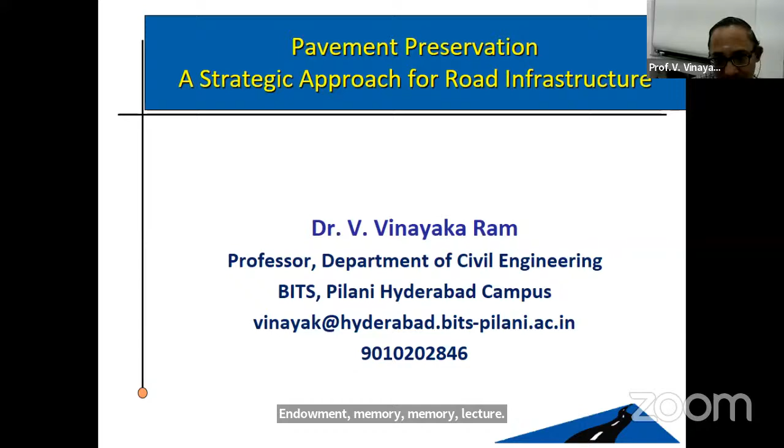So today we are going to talk about pavement preservation, a strategic approach for road infrastructure. This is what we actually target for — a beautiful road without any failures, serving for a very long time. Usually we talk about 10, 15, or 20 years of service life, whether it is a flexible pavement or rigid pavement. We want the road to be serving very beautifully, just like this.

But is this the way roads are happening right now? The problem is the roads are not maintained properly unless a failure is occurring or has happened. Our departments will not initiate the process of maintaining roads. So in this lecture, what I'm planning to discuss is why can't we go for preventive maintenance aspects? It's not a new topic altogether, and the rest of the world is using it — some countries very popularly — but India is yet to take off in implementing these preventive maintenance aspects.

So I will share my views. Many of these views are already available in Federal Highway Administration's reports. I just compiled all the reports and tried to present them here.

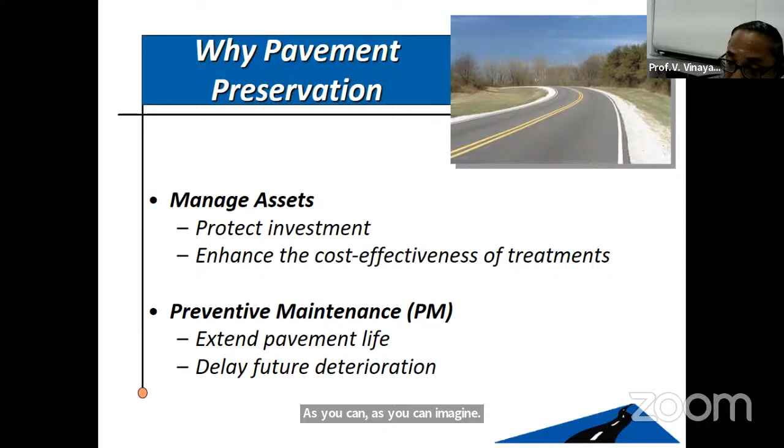Now, coming to the topic — why is pavement preservation required? What is so great about it? Basically, it's part of pavement asset management, and pavement is the biggest asset the world can ever see, because the amount of money that goes into pavement construction is enormously high. As you can imagine, a single lane highway per kilometer per lane will cost anything between 3 to 5 crores of rupees, or even 7 crores. It depends on the subgrade condition as well as other conditions, like how many cross-drainage structures are required and how it is going to perform.

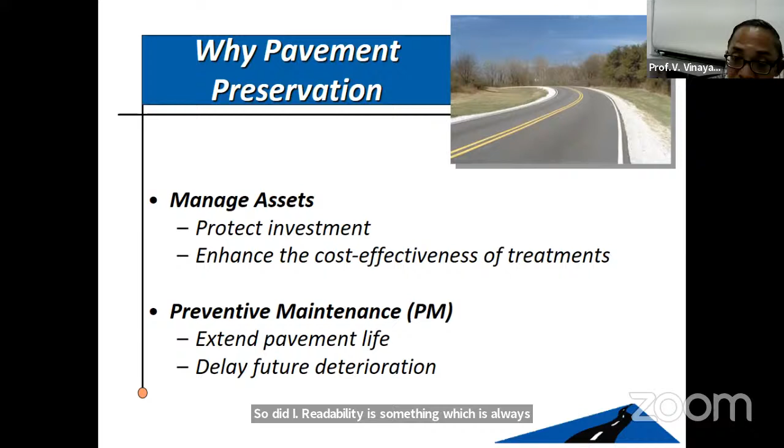Weather conditions also play an important role. If extremely bad weather conditions are prevalent in a particular area, you may have to use special materials and special binders to manage the performance of the pavement. Rideability is always important, and in extreme weather conditions it becomes very challenging, so we need better materials and conditions for the road to sustain for 15-20 years.

It can cost anywhere between 3 to 10 crores of rupees per kilometer per lane. So it's a big asset, and thousands of kilometers of roads have been built, but unfortunately most of the roads are not maintained properly.

Unless there is a program like PMGSY, where for 5 years the contractor has to build the road and then maintain it for 5 years without any problem, such mechanisms are not available in many other cases.

Secondly, such programs enhance the cost effectiveness of treatments. Treatments are something that are always quite tricky, and applying the correct treatment is a big challenge.

Many of our engineers, unfortunately, are not really aware of what kind of treatment they are supposed to use, at what time, and how to implement it. Not many of us are trained in that manner, and we are lacking manpower on that side.

In addition, the availability of appropriate materials is a big question mark. Appropriate machinery is also a big issue.

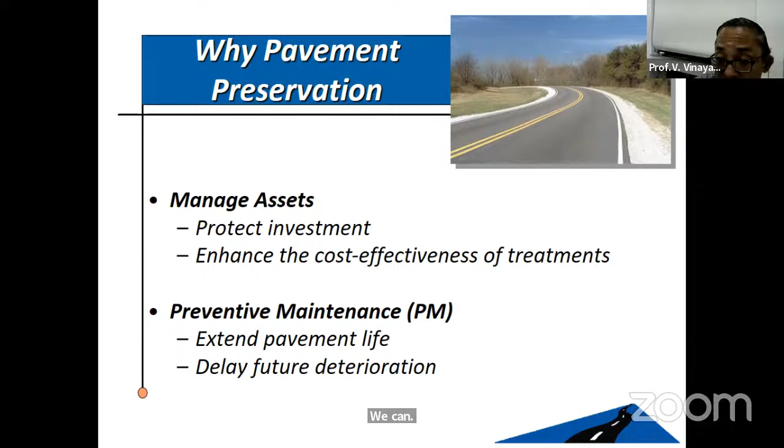Hydrophobic materials can be added as part of the bituminous concrete to enhance the life of the pavement. These are all various things we can learn under the pavement preservation concept, including the advancements the world has seen, which I'll be discussing in this lecture.

Enhance the pavement performance. The performance, functionality, as well as safety is something which is always seen by the drivers. The moment a person is going on the road, whether he is a transportation engineer or a general normal person who doesn't have any idea about transportation, still they will judge the pavement quality based upon the functionality as well as safety - how much friction the pavement is giving, how much safety, how much smooth riding surface the pavement is giving. All these things are actually judged by everybody.

Whether you like it or not, when the road is beautiful, immediately the kind of satisfaction comes and crops up. The driver will say, okay, I'm driving a very good surface. Similarly, when the road is having a lot of potholes and other things, immediately our brain will start rating the pavement and cursing all the engineers involved in the maintenance process. So the serviceability of the pavement, or condition of the pavement, is something which is actually playing an important role in day-to-day life of the human being.

So that will be the topmost priority of the pavement preservation concept. Then, reducing the user delays. What is this user delay? User delay is something wherein when the pavement is not in good condition, obviously the riding quality will not be adequate, and you can't travel at the speed at which you would like to travel. So obviously delays are going to happen, and potholes especially - not only delays, even loss of life is also enormously high in the case of heavily potholed roads.

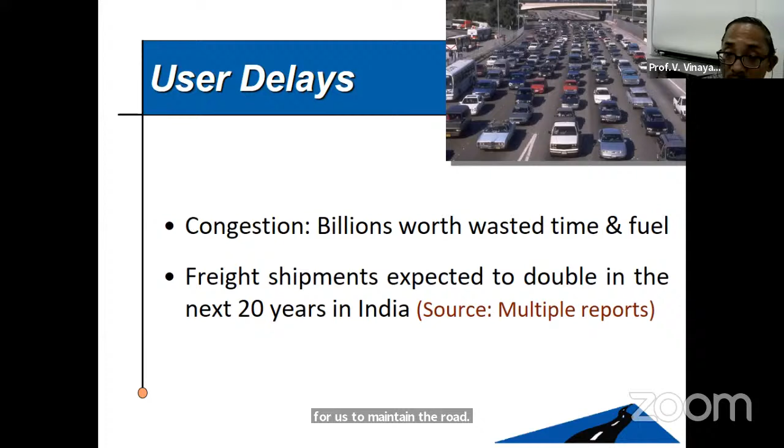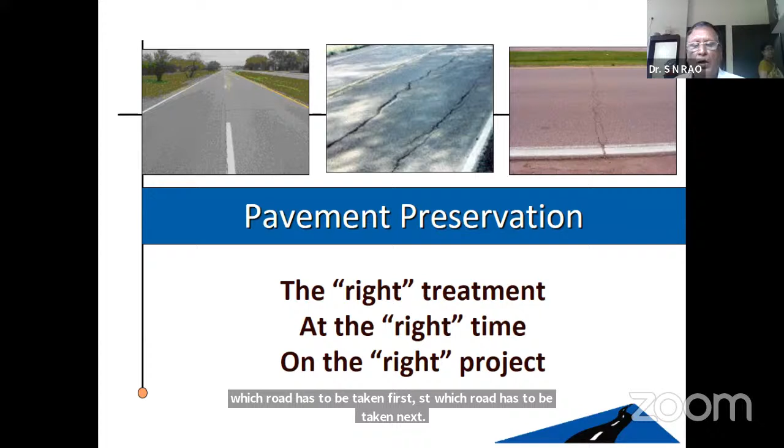Then, what is pavement preservation? Pavement preservation is something where we actually go for the right treatment at the right time on the right project. For example, we have multiple roads, and the big network of roads will be given to a pavement management agency, and that agency is supposed to take care of all the roads and maintain them in good, rideable, or serviceable condition. So which road has to be taken first, which road has to be taken next, which road has to be given priority, which doesn't require any priority - all these things we need to actually take judicious decisions on, based upon some scientific process. That's what we require actually.

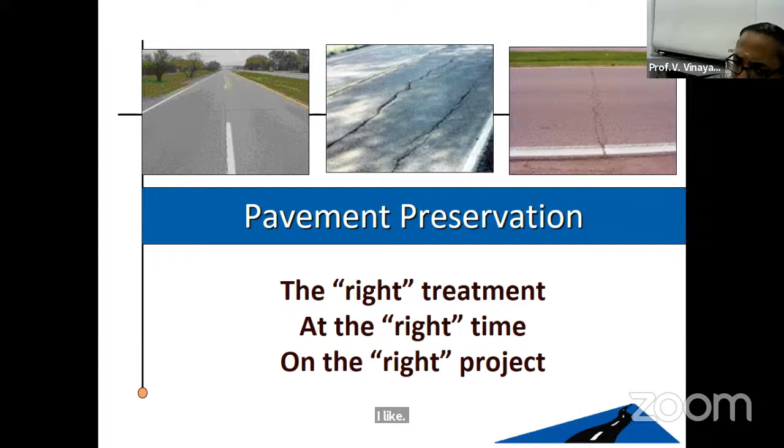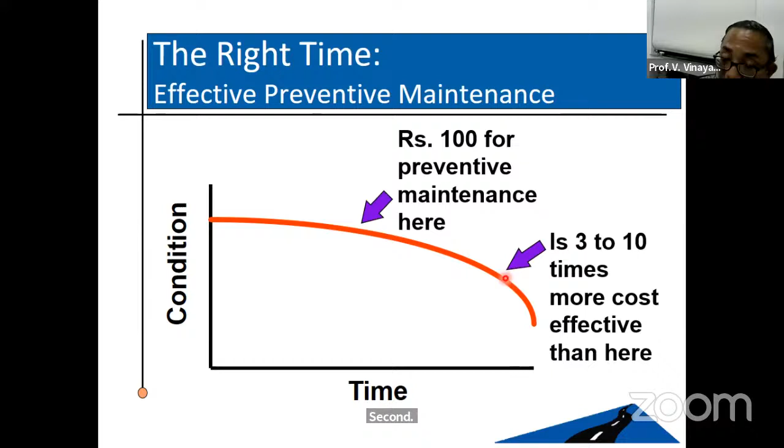Then, if you can see here, the right time - if you spend something like 100 rupees for preventive maintenance here, the condition is not deteriorated, it is still in good condition only. At this point of time, the Indian understanding is we will never even look at the pavement when it is in good condition. But the preventive maintenance aspect, which is going to be discussed today, clearly mentions that you need to have a kind of preventive maintenance program, so that the 100 rupees spent here is worth 3 to 10 times what is actually spent here. I mean, if you are spending 100 rupees here, you may be spending almost 1,000 rupees if you start looking at the pavement only after it deteriorates, trying to bring it back to good condition. So that's why it's very essential for us to understand the importance of the preventive maintenance aspect - it will extend the life enormously.

When we design the pavement for 20 years or 15 years, the actual life of the pavement is going to be much more than that when you go to the preventive maintenance aspect. So if you look at the life cycle cost analysis, the pavement condition deteriorates with usage, and with time it actually goes down.

This is where we are supposed to have some maintenance, for example based on the pavement condition index, or PCI, which we normally find out in the field. Every engineering department will have their own division where every year they travel on the road to find out the various failure conditions and rate that pavement on a 0 to 100 scale. 100 is the best possible condition, whereas 0 means the pavement is not at all there.

There is a threshold value here, around 50, and we are supposed to structurally lift the quality of the pavement so that it becomes good quality again, and the traffic will feel more comfortable.

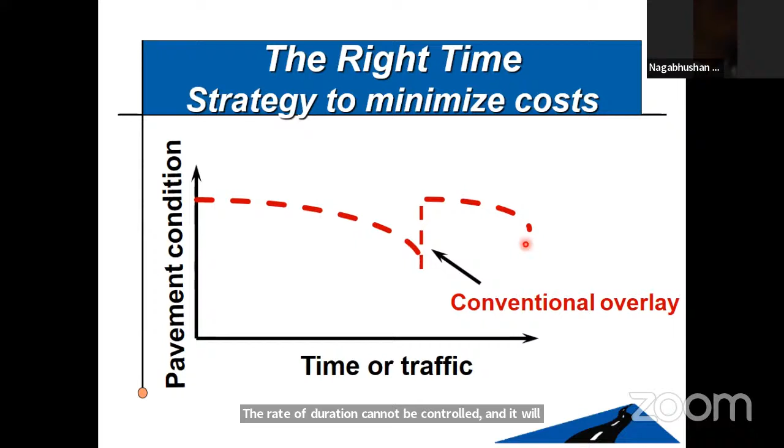So we should actually stop this. With this conventional overlay mechanism, the rate of deterioration cannot be controlled, and it will fail at very frequent intervals. We have to take care of this, so conventional overlay is not going to work.

You can see here the green line, that is what is called preventive maintenance. We are not allowing the pavement to go down, and we are having small treatments, a very small treatment here, here, and here. Throughout the life of the pavement, the serviceability condition is absolutely beautiful.

So the road cycle, the vehicle operating cost, generally called road user cost, every cost will be very minimal when you go for preventive maintenance treatments. The replacement of spare parts of vehicles will be minimized, and people will be extremely happy, and the economy is also improving.

There are indirect benefits too, in terms of the number of accidents getting reduced with better roads being provided throughout the service life without any gap, and vehicle operating costs coming down drastically. Pollution is also coming down, and there are so many other benefits which cannot be measured in terms of money.

Of course, a road user cost study report can give you some guidance about converting travel time savings or vehicle operating cost savings into categories, so you can find out how much savings you're making. But in reality, the amount of savings the society is going to have is enormously high, so you can't even compare.

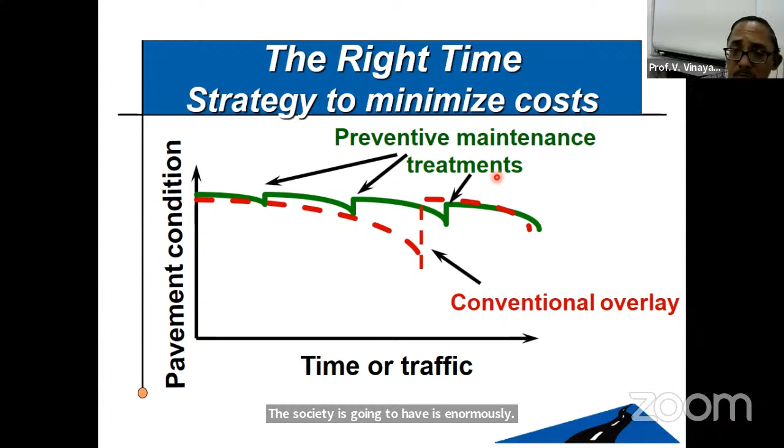This is the beauty of the preventive maintenance treatment. As I told you, preventive maintenance arrests the deterioration, retards the progressive failures, and reduces the need for corrective maintenance. Let me give you one small example: you are allowing a pothole to happen, so the pothole has taken place, some cracks have extended, and water has ingressed into the pavement.

After vehicles continue moving over such cracked portions, the cracked portion slowly gets detached from the pavement, and progressive formation of the pothole occurs. The pothole becomes bigger and bigger, especially during rainy seasons, when rainwater accumulates in the pothole area and progression becomes enormously fast.

So when it is progressing very fast, why is that happening? Because you have not treated the cracks properly at the appropriate time. The cracks have networked, and water has found its way into the pavement, causing stripping and other failures.

Then potholes start happening, and vehicles keep moving because no repair is being done. By the time the department wakes up and goes to the site to start repairing, the damage would already be very big. Once water enters the bituminous pavement, the bitumen doesn't behave or perform the way it's supposed to.

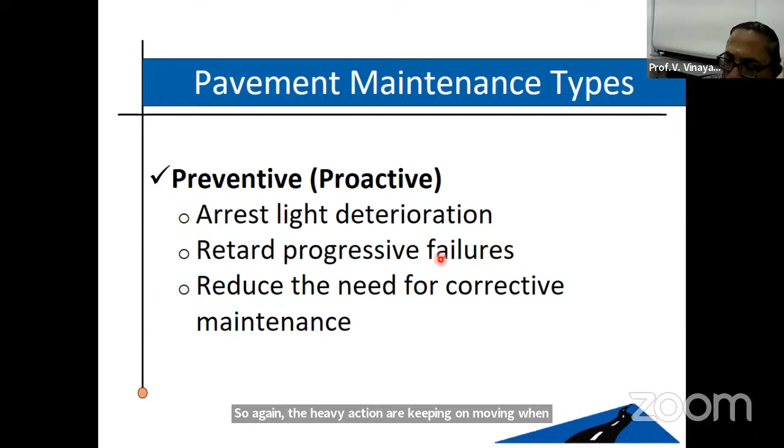This is one of the worst possible scenarios. Heavy axle vehicles keep moving, and as they move, the impact load and fatigue load applied on the pavement keep increasing because of the undulations and potholes.

So the failures actually propagate, causing further deterioration and increasing the rate at which deterioration takes place, making the failure pretty high and pretty fast. So in-time maintenance is something very, very important.

If you don't allow the cracks to even develop or go beyond certain limits, then the further repercussions of pothole formation can be completely prevented. We have to take care and arrest the light deterioration at the beginning, so that heavy deterioration doesn't happen and we don't end up with a lot of failures to really attend to. That is one very important thing we need to do.

Of course, corrective maintenance is what Indians are using. Most departments are still using only corrective, reactive, or prescriptive kind of mechanisms. Unless the failure is coming, engineers will not go to the site and will not initiate the process of maintaining or repairing the pavement system.

So cracking correction, excessive deflections - of course they don't even bother about excessive deflection. That's what I have seen with my own experience. When deflections are happening, it is a clear indication that the pavement has lost its service life, and the structural strength of the pavement has gone down.

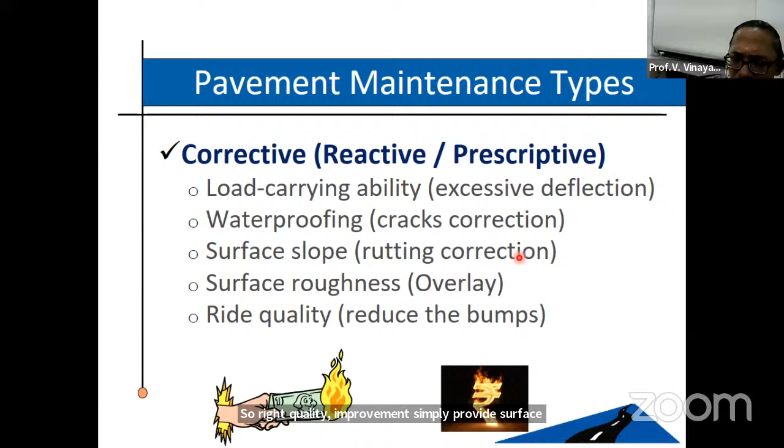So corrective measures, reactive or prescriptive measures, they are all not scientifically planned. Most of the failures are repeatedly happening because of unscientific corrective measures or prescriptive measures. For ride quality improvement, they simply provide premixed carpet; for surface roughness, again one more layer of premixed carpet. Unfortunately, this is what is happening. That should be stopped.

There is a beautiful slide given by the Federal Highway Administration on Pavement Serviceability Index, or Pavement Condition Index (PCI) as we call it in our Indian context. All our engineers know how to find out the PCI through surveys. You can rate the pavement in the range of 0 to 100 -- 100 is the best pavement service, and 0 is the worst condition.

If you see, at about 90 starting down to 60, that range is always a good pavement. 50 is the threshold value. Anything above 50 is actually a good, acceptable condition.

So 60 to 90 is the range where routine maintenance can be done. Whenever you see small failures, small cracks coming, immediately go and fill the cracks -- don't even wait for the crack to become big. You have to do all that. Small potholes may happen, and they have to be filled within no time. This kind of routine maintenance should be taken when the pavement serviceability condition is in between 90 and 60.

Similarly, preventive maintenance: when the pavement condition is around 80 down to about 50, that is the right time for you to go for preventive maintenance. This is not just given arbitrarily -- a lot of studies have been made by the Federal Highway Administration, one of the world's topmost organizations in the pavement engineering industry. This is what Americans follow, American road agencies follow, and other advanced countries are also following the same thing. So within this range, preventive maintenance should take place.

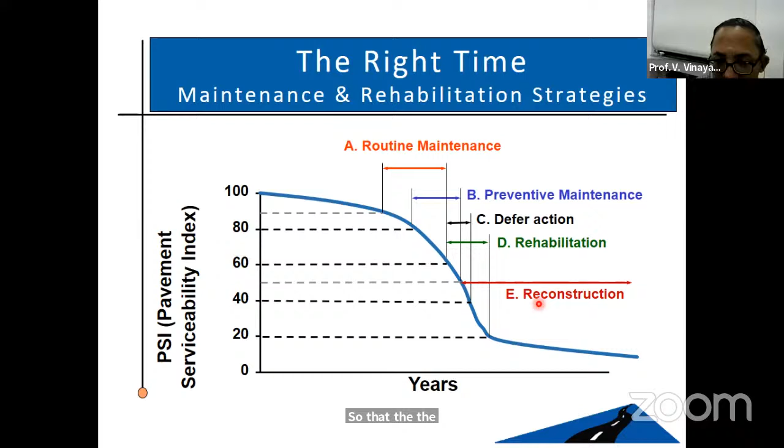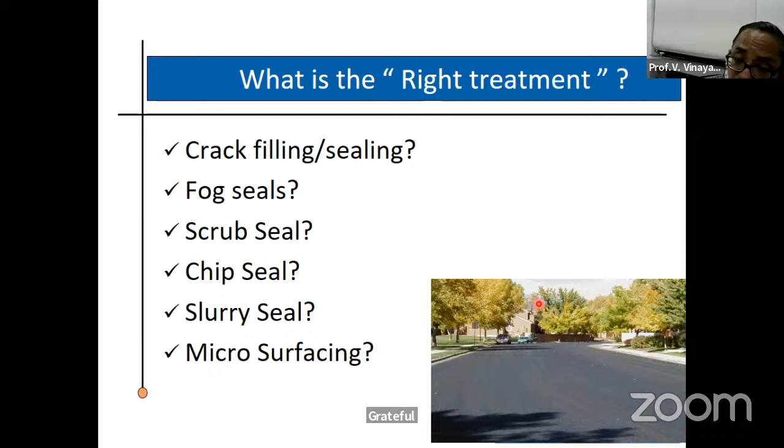Now, what is the right treatment? We need to understand this: crack filling, sealing, fog seals, scrub seal, chip seal, slurry seal, micro surfacing -- these are all names we normally hear. Macro surfacing, thin bonded wearing course, thin HMA (hot mix asphalt) course, overlays -- these are all various names we hear on a day-to-day basis. But what to use, when to use, and how to use -- there is no clarity on all these things.

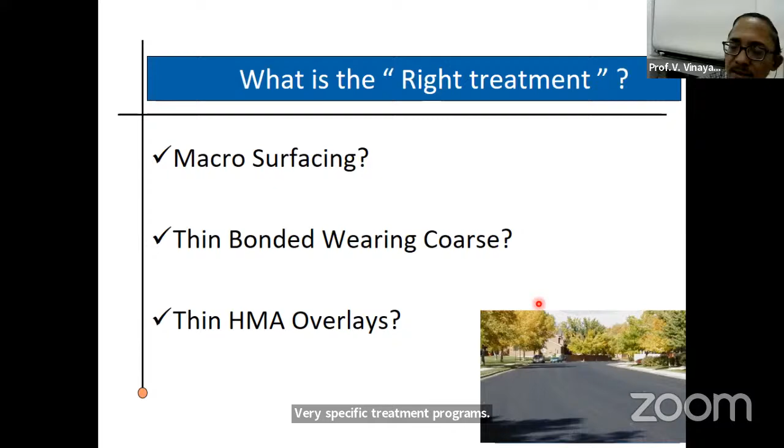That's why I suggest all engineers go through this particular mechanism. This is only a beginning -- within 1 hour or 1.5 hours I will not be able to cover all the areas required. I usually give training programs for in-service engineers for 3 to 4 days; I gave such training earlier at ASCI. I think it requires a longer time to train every aspect of these specialist treatment programs, so that engineers will be able to completely understand and then go to the field and start working on that.

I'll just give an overview of what is what. The right treatment depends upon the existing pavement. First of all, we have to analyze the type of pavement and the kind of distresses available, whether it is a structural distress or functional distress, and whether drainage is properly available.

Drainage is something which is unfortunately very poorly managed in India. Most of the failures are initiated because of very bad drainage systems. In Hyderabad, during the Nizam's time, whatever drainage system was provided, the same drainage with an addition of another 10% has been maintained. But the current road network in Hyderabad is way ahead of Nizam's time, and most roads will not have any kind of drainage at all.

That's why even if a small rainfall happens, the entire road gets inundated. Big floods come, resulting in a lot of loss of life and a lot of failures. Again, potholes are a perennial problem in Hyderabad, just because of very poor quality of drainage.

In India, our people are not actually taking it forward. There are so many institutes and experts available in and around Hyderabad who can give the solution for all this, but unfortunately nothing is taking place. Even today, Hyderabad is suffering. Floods are happening, and pavements are failing with a lot of potholes and other failures because of the very poor quality of drainage system available in Hyderabad.

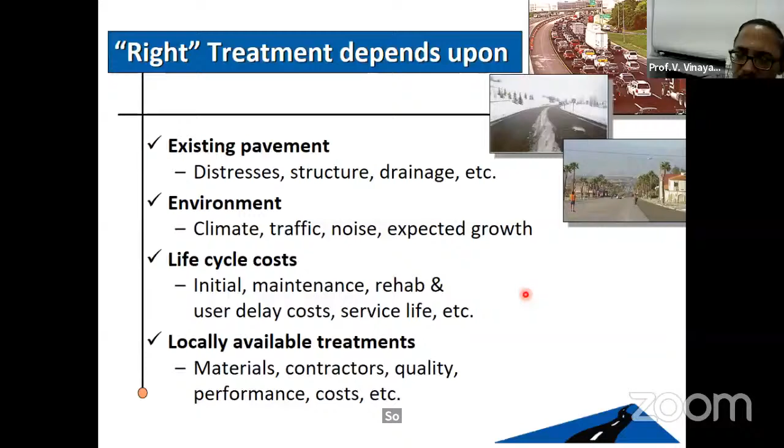Then SHRP has its own manual, which can be downloaded free of cost. All of us can download this manual, called a distress identification manual. It's a very popular, world-class manual. Several other manuals are also available, and you can choose any of those.

Some colorful manuals are also available. You can just take those manuals, and an engineer can learn so much knowledge or information regarding how the pavement fails and how to really find out the cause. The cracks look alike, but the reason for every crack is different.

Unless you understand the perfect reason why that crack is visible or how it is progressing, whether it is a networked crack, longitudinal crack, or transverse crack, the reasons are completely different for each. Where exactly the crack is lying, whether near the joint of the lanes, at the edge of the pavement, or in the middle of the lane, all that information you can find in the distress identification manual with beautiful clues and cues in the form of photographs.

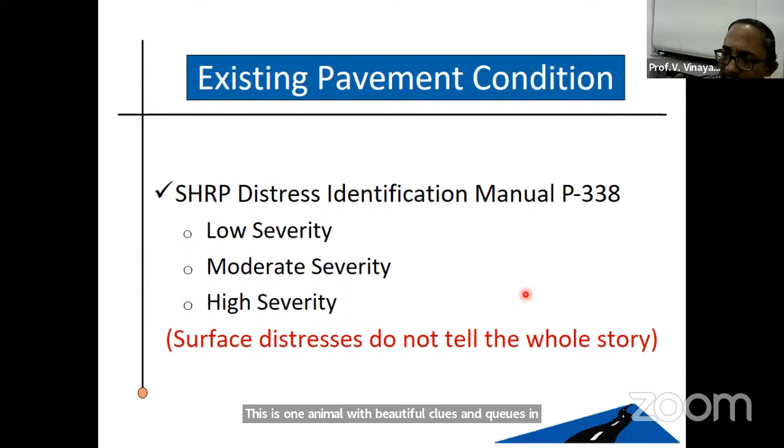The engineer can study that manual, take it to the field, and match the photographs with the failure happening there, and accordingly take the appropriate maintenance option. So unless you identify the reason, you will not be able to give the appropriate solution.

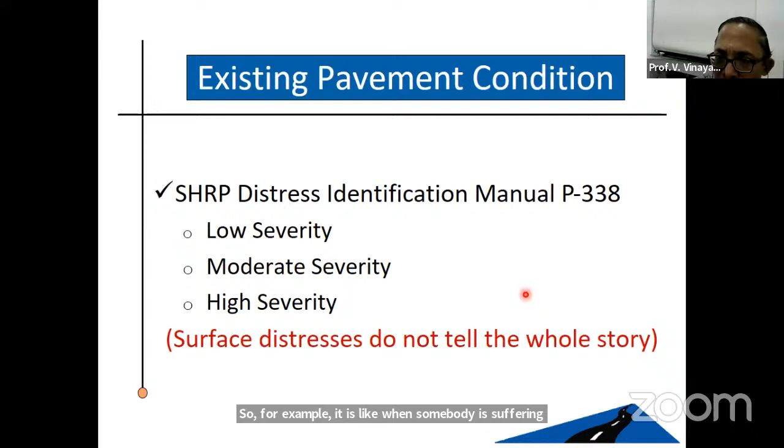For example, it is like when somebody is suffering with cancer, if you give crocin, will it really get cured? It is not going to cure. It is going to progress very, very fast. So that kind of thing should never happen.

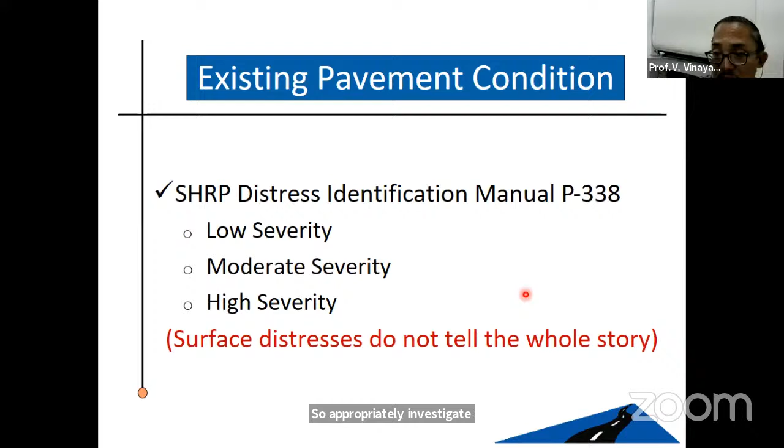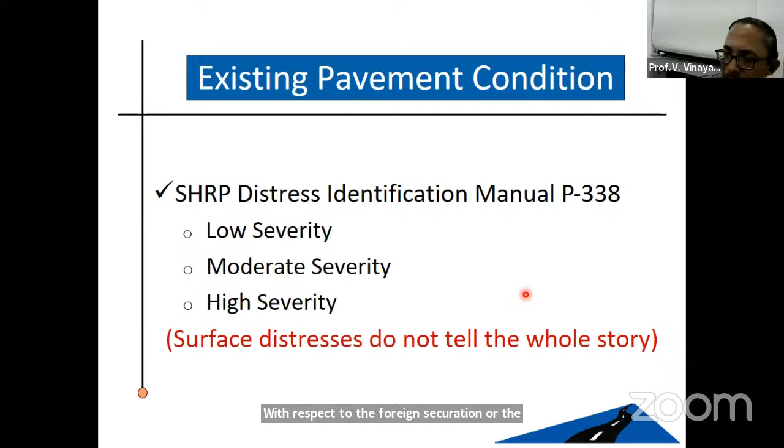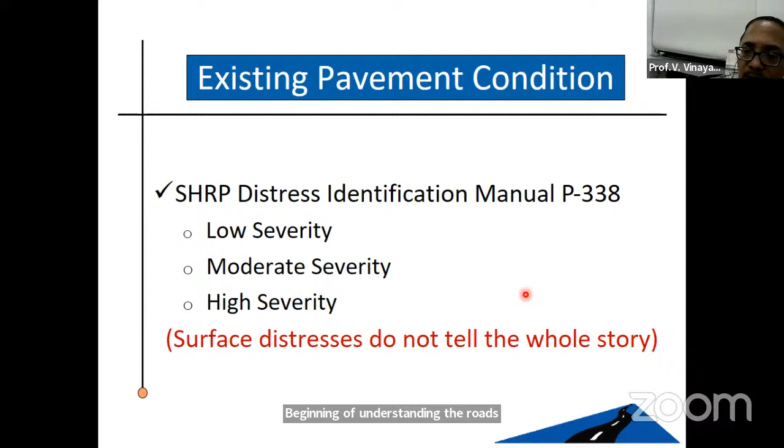You have to actually be a road engineer, a road doctor as we call it. So appropriately, forensically, you have to investigate. This forensic investigation is very important, it is a kind of need of the hour. Engineers on the field should be trained with respect to forensic investigation of various distresses. If somebody studies this manual, it will give a wonderful beginning of understanding the failures of roads and then how to really go ahead with the solution.

When you have got this much of crack, what are they doing? Another layer of bituminous premix concrete or some other overlay. But this crack means the stress is already released. Now again, you are creating stress by having this overlay, so the stress gets released again through cracks. The crack is initiated, and in the same vertical line, the crack will propagate, and again this overlay will get opened up within no time. So it's going to be a waste of exercise unless you take care of this interface.

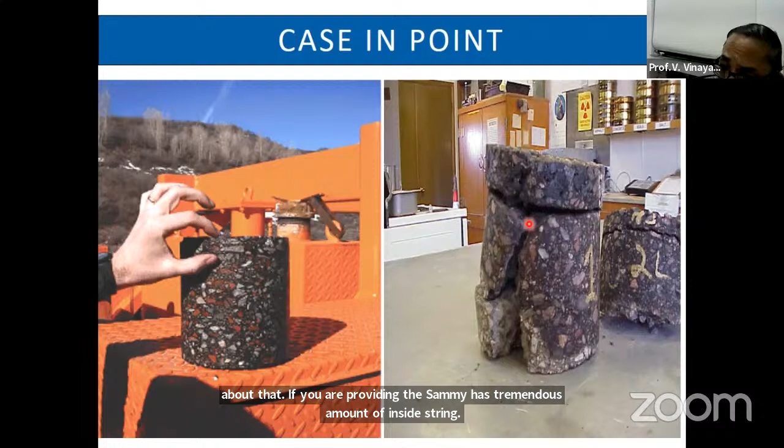So what is this interface? There are some solutions like SAMI interlayer, stress absorbing membrane interlayer. They are available, it's not theory, it's all practical. You need to provide those solutions there. If you provide SAMI interlayer above that, it has tremendous tensile strength, and this crack, if it wants to propagate, cannot crack through the SAMI interlayer into the top layer.

So the crack propagation will get delayed. Unless the SAMI interlayer is failing, the crack will not propagate into the top layer. So by just having one interlayer, one matte kind of SAMI interlayer between the failed surface and the top surface, you are delaying the failure basically, not solving it. If you want the entire solution, you have to go to the root cause of this failure, why this crack is happening at all. Then you can have the forensic solution, and you may have to remove the failed layers, recycle them, and replenish with a better layer.

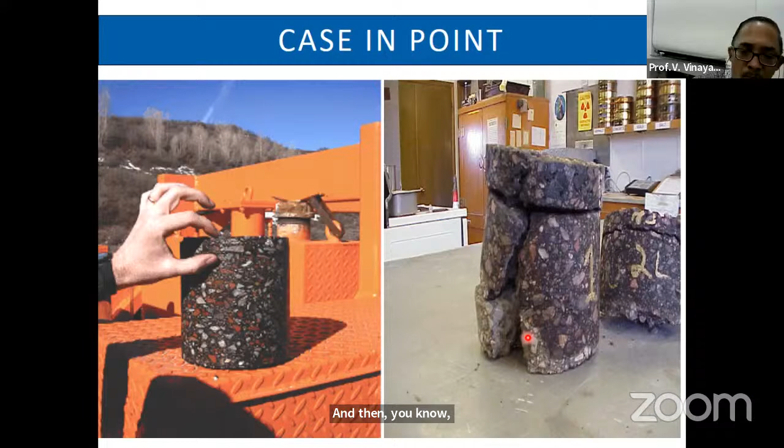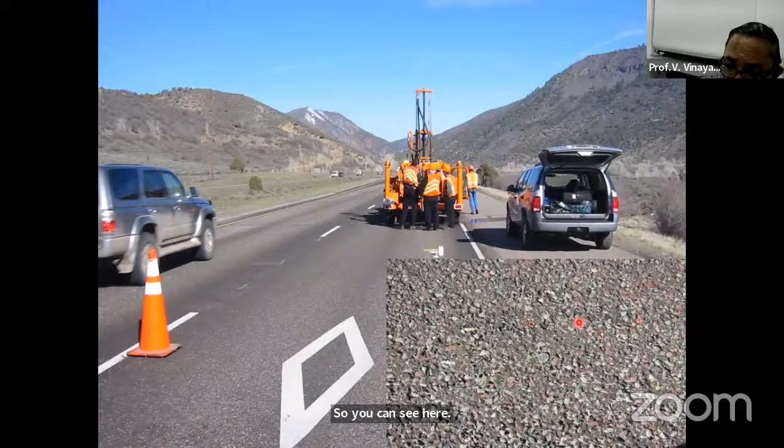Similarly, when the aggregate crushing value is less than 30%, please accept it. That's how it goes basically. But the mineralogy of the rock or stone is never taken into consideration. If it is a hydrophilic aggregate, even if it is passing other strength-related tests, it is not going to be a good option for the bituminous concrete layer or bitumen-based layers. That small mistake, the repercussion will be very, very bad.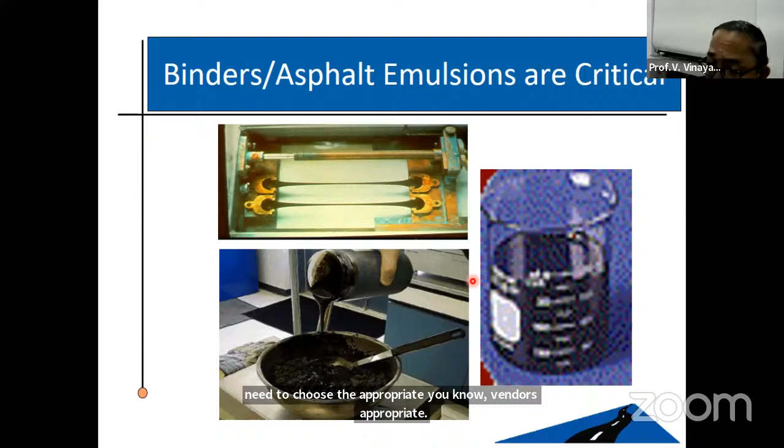So I think asphalts, binders and asphalt emulsions are all critical. You need to choose the appropriate binders, appropriate emulsions for various applications. Emulsions are being used for cold applications, whereas binders are normally used for hot applications.

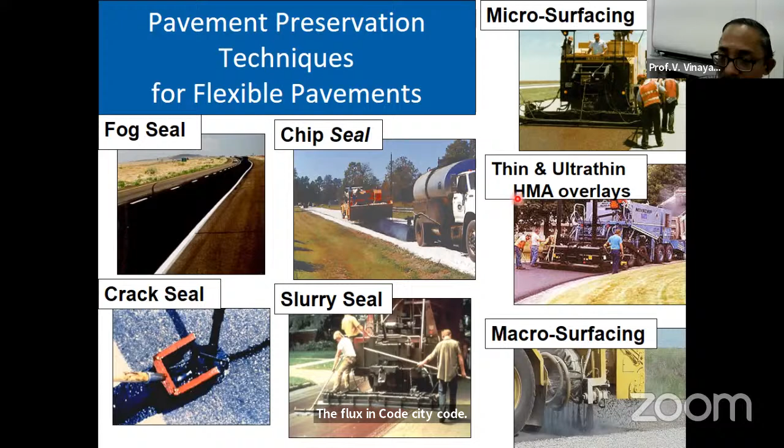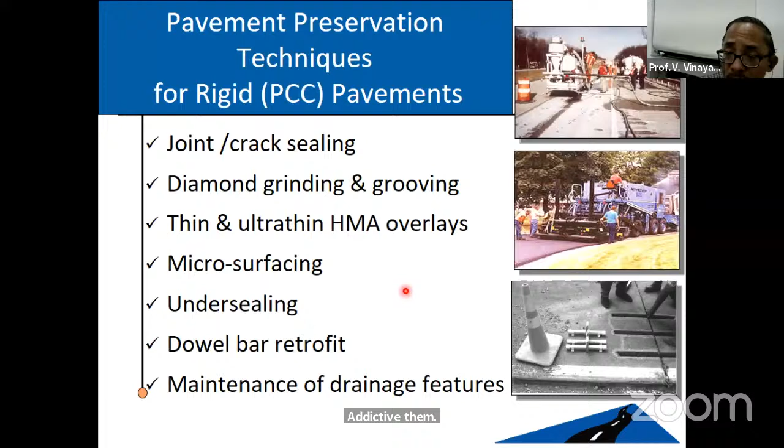Okay, so what are the various techniques available? As preventive maintenance programs: fog seal coat, chip seal coat, crack seal coat, slurry coat, micro surfacing, thin and ultra-thin HMA overlays, that is hot mix asphalt overlays. There are several techniques for bituminous concrete pavement. For cement concrete pavement, we have joint or crack sealing mechanism, diamond grinding and grooving, thin and ultra-thin HMA overlays, micro surfacing again, under sealing, dowel bar retrofitting, and maintenance of drainage features. These are categorized as techniques for PCC pavement under preventive maintenance programs.

So what is crack sealing? You can see here, when the crack is very, very small, we should have the necessary tools to fill the cracks properly and prevent further failure. When you have the tools to fill small cracks, further failures will not happen, and potholing is not going to happen at all. If you properly fill the cracks and see that water is not increasing or going into the pavement layers, that's very important. So routine maintenance, cleaning and sealing has to be done.

This prevents intrusion of water and incompressible materials. What are incompressible materials? When cracks are allowed to remain during dry seasons, small stone pieces fly and deposit inside the cracked areas - these are called incompressible materials. When incompressible materials go into the crack, the stresses on both walls of the crack will be high. When vehicles move, the stress generated by the incompressible material on the crack walls will actually open up the crack much further, so crack propagation increases over time. We should not allow any foreign material or incompressible material to enter the cracked areas.

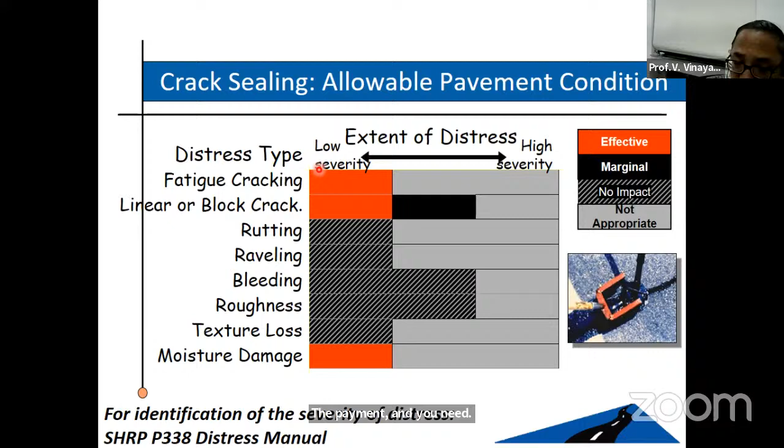So this is a wonderful tool in the hand of the pavement engineer who can take decisions based upon this particular sheet. You can see here, fog seal coat.

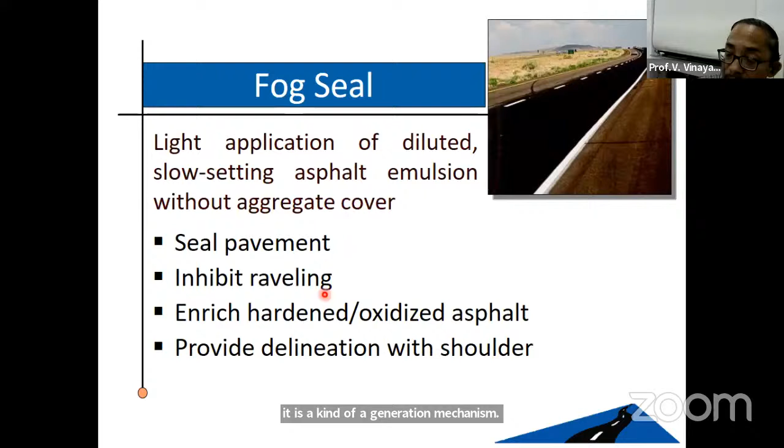There's another variety of solution. From a distance, if you see, when the seal coating is done, seal coat is actually applied on the pavement, it looks like a fog. It's a light application, diluted, slow setting asphalt emulsion or bitumen emulsion without aggregate. There is no aggregate here, it's only emulsion which is sprayed very fast. It looks like fog, so it's a kind of rejuvenation mechanism. It seals the pavement, inhibits raveling. Raveling means the separation of bitumen from aggregate, and aggregates are getting loose from the surface. So raveling also will be reduced, and the rejuvenation, you can see bright black color of the pavement when it is fog sealed. That kind of rejuvenation is possible.

It can enrich hardened or oxidized asphalt. When the pavement is old, maybe 4 or 5 years old, then oxidized or aged bitumen can be seen. Pale color, not dark black or dark brown color anymore, it converts into light brown color. So that very clearly indicates that the pavement has failed basically, the aging has taken place. So you can have this fog seal coat, it will seal all the surfaces and it rejuvenates.

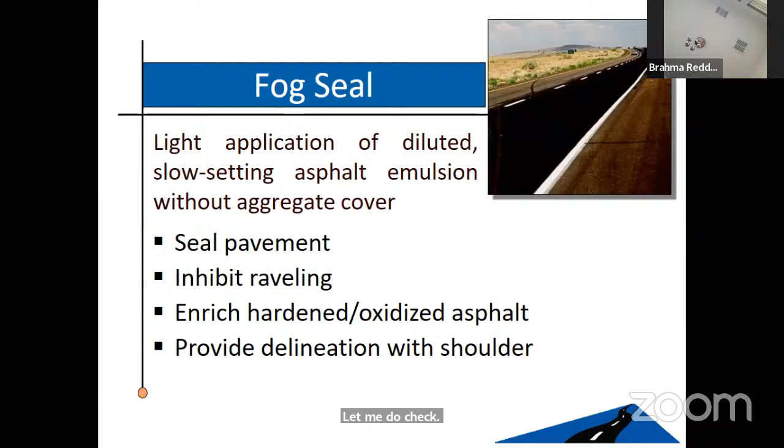Brahma Reddy, can you mute your mic please? Hello. Kindly mute your mics so that I can talk without any intervention. Hello, Brahma Reddy. Can somebody do the needful in muting the mic, please? Can somebody from Institution of Engineers speak, please? Hello. Hello, can you mute the mic, please? Yeah, thank you, please see that it is muted properly, sir.

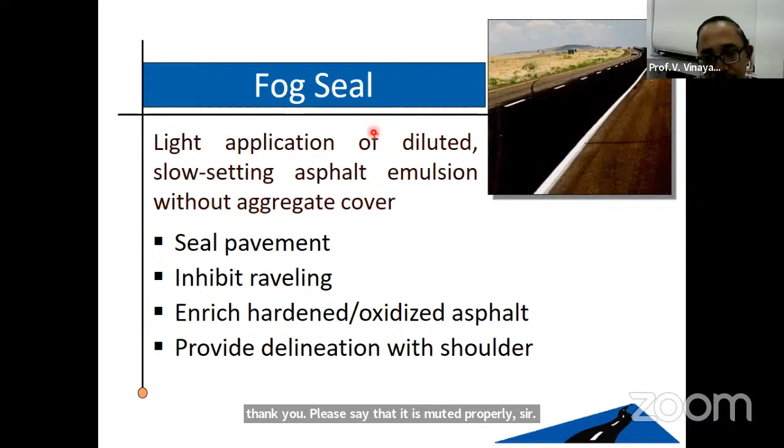It's going to be pretty dangerous. The moisture which is actually entrapped inside the bituminous concrete layer is going to deteriorate the actual pavement surface much more faster than earlier. When fog seal coat was not applied, when severity levels are medium or high, at least there was a possibility of moisture to evaporate into the atmosphere. But once you put that particular thin seal, the fog seal, the water will be entrapped permanently inside the bituminous concrete layer, and the deterioration will be much more faster. That's what it very clearly says - it is not going to be appropriate at all. You are not supposed to use fog seal coat when the failure levels are medium or high severity.

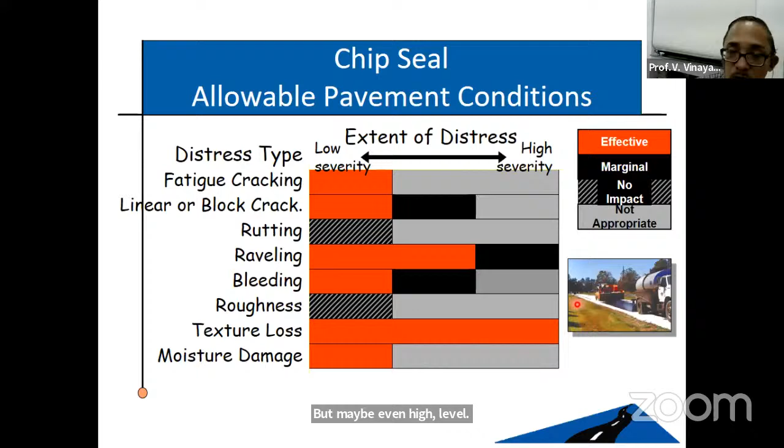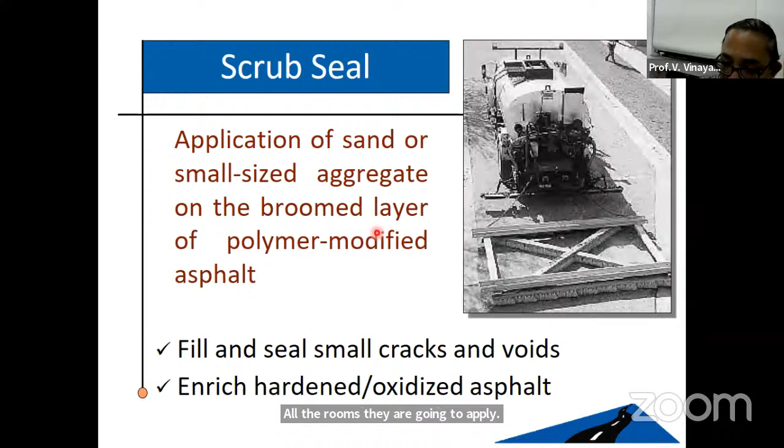We'll go on to scrub seal coat - application of sand or small sized aggregate on the broomed layer of polymer modified asphalt. So a polymer modified asphalt layer is laid and broomed. On the broomed layer, they apply sand or small sized aggregate particles, thereby giving the texture required for the pavement. Even this is not really suitable for medium and high severity levels for any kind of failure.

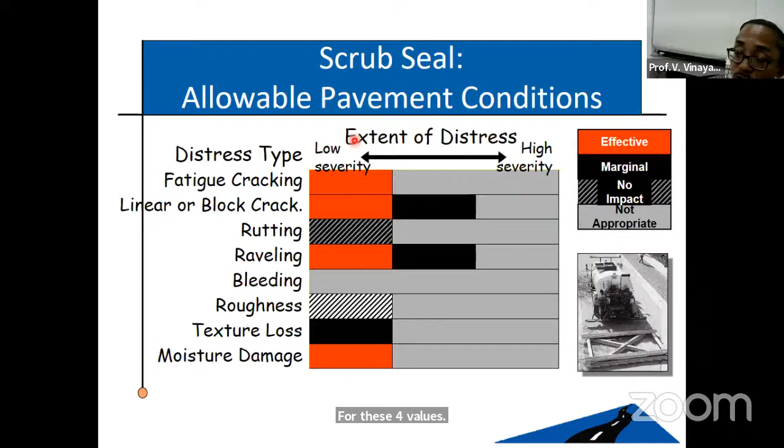But for low severity failures - fatigue cracking, linear cracking, raveling, and moisture damage - for these 4 failures, scrub seal is going to be a very, very good solution. Similarly, macro surfacing is very popular.

Macro surfacing is the synchronized continuous application of ultra-fast polymer asphalt emulsion and single-sized durable aggregates. If you want to learn about macro surfacing, manuals are available from the FHWA websites. You can go through those manuals and learn very easily - they are all free of cost, downloadable. I have given the links at the end of this lecture so anyone can go to that site, download the material, and read it thoroughly.

Macro surfacing also seals the pavement, improves the surface texture, and is good for very high volume traffic pavements. For texture loss, it is going to be very, very suitable - a beautiful solution. For raveling, up till the medium level of distress, this is a good solution. But for high severity failure, this is unfortunately not a good solution at all.

So these are all the various solutions, but looking at the rates here, except for rutting and roughness, for low severity failures macro surfacing is a good solution. But popularly, it is believed that macro surfacing is a universal solution for every failure condition - but that is not the truth.

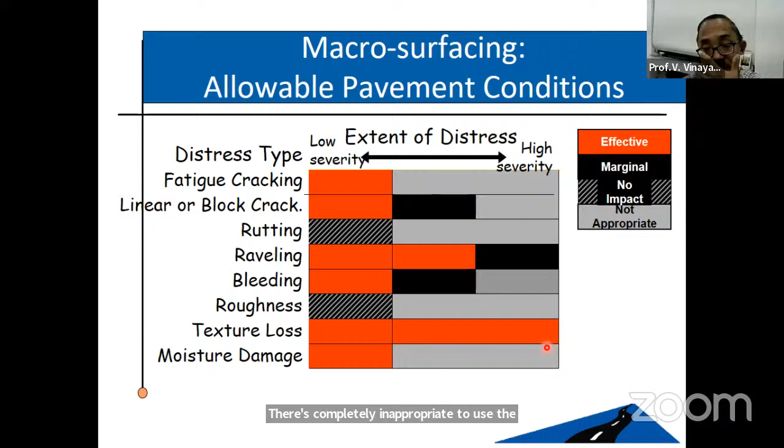If you look at fatigue cracking in the case of medium or high severity condition, this is not appropriate at all - we should not even think of using this. Similarly, when moisture damage is of medium or high severity, it's completely inappropriate to use macro surfacing - it's going to be very dangerous. As I told you, the same reason: the moisture gets entrapped in the pavement because of the macro surfacing, and it will do its own work in spoiling the rest of the top surface of the pavement.

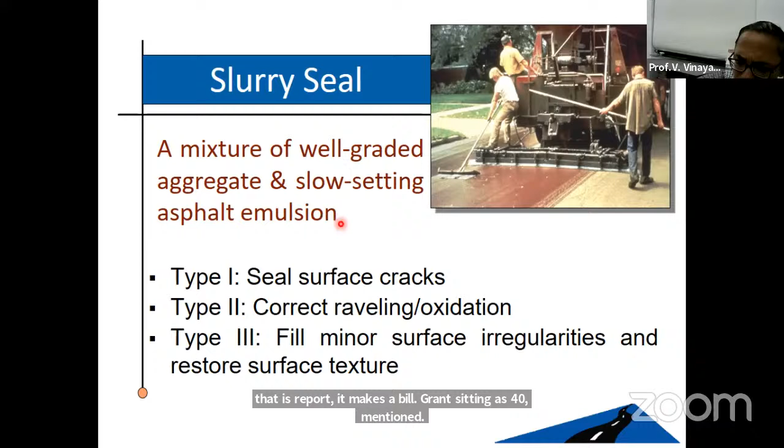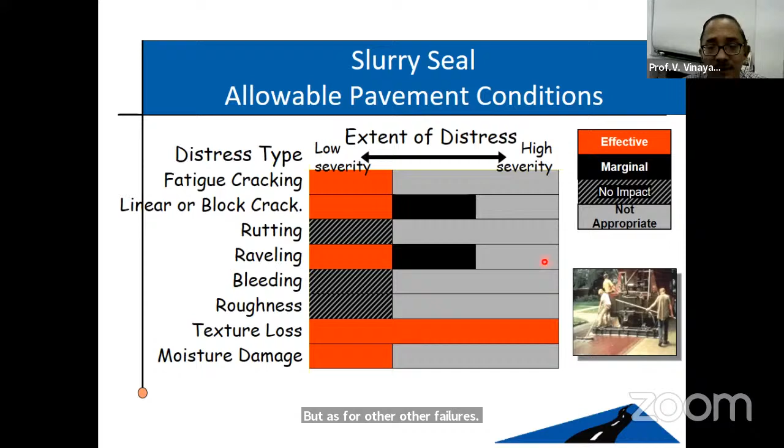Since slurry seal is a mixture of well-graded aggregates and slow-setting asphalt emulsion - there are type 1, 2, 3 solutions available - this is also suitable for texture loss, whereas for other failures at medium to high severity conditions, this solution is also not going to be a really good solution.

Micro surfacing is a very heavily talked about solution. In India, many agencies are actually boasting of providing the micro surfacing solution. It's a very good solution - a mixture of high quality aggregates and polymer modified emulsion binder. These are 2 combined materials, and for micro surfacing there is special machinery available - it's not possible with routine road building materials and machinery to actually provide micro surfacing. So this inhibits raveling, improves surface texture, fills the ruts, and seals the pavement surface.

You can see here a lot of pictures are there. Now you can see this particular picture where it can work very well for rutting and raveling, even up to medium severity level.

Texture loss, this solution can work for all severity levels. Whereas for all other failures, whatever the failure is, at low severity level this solution is going to be a very good solution. It can actually extend the life, but for medium to high severity fatigue cracking, this is not going to be an appropriate solution at all.

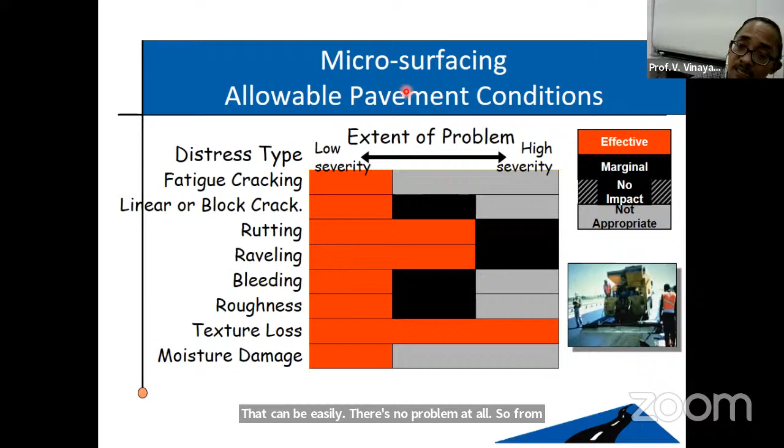If you suspect fatigue cracking, then micro surfacing is appropriate only when the fatigue cracking has not gone beyond low level. When the cracking intensity is more than 20% of area, we call it medium severity. If it's less than 20%, it's low severity. When it's more than 40% of area covered with cracks, that is high severity. The FHWA manual gives all these indications, so we can judge whether it's medium or high severity easily, and from that we can decide whether microsurfacing could be a good solution or not.

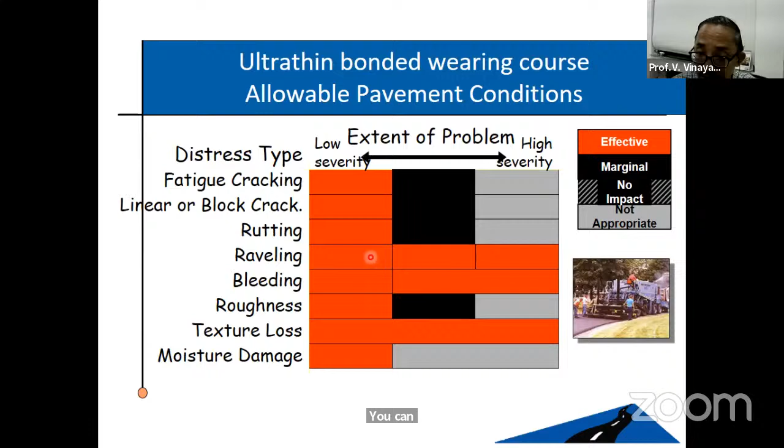Now, ultra-thin bonded wearing course. This is another solution available, a slightly better version. It addresses raveling, bleeding, and texture loss for all these three failures. Whatever may be the severity, this is a beautiful solution again.

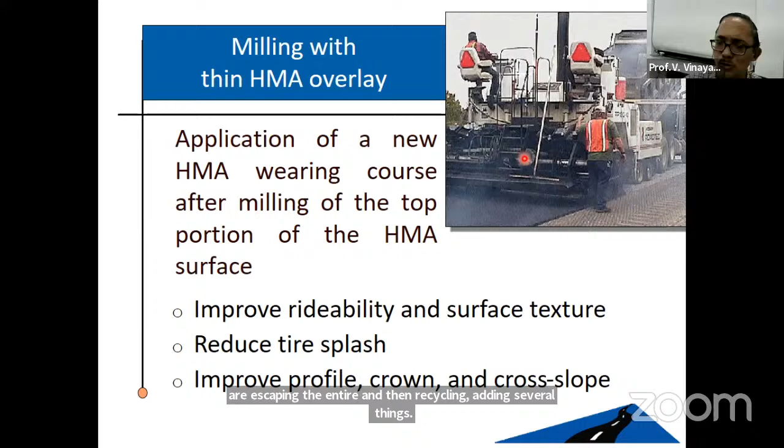Similarly, milling with thin HMA overlay. This is recycling, and in India we are actually following this. We scarify the layers, mill the bituminous concrete pavement, and then recycle that with added new bitumen, new aggregates, and probably some rejuvenators. All these things are mixed together, then we lay that layer and compact with rollers. Many road agencies use this slightly costlier version because we scarify the entire layer, recycle, add several things, then relay and compact. It's like almost laying a new surface layer.

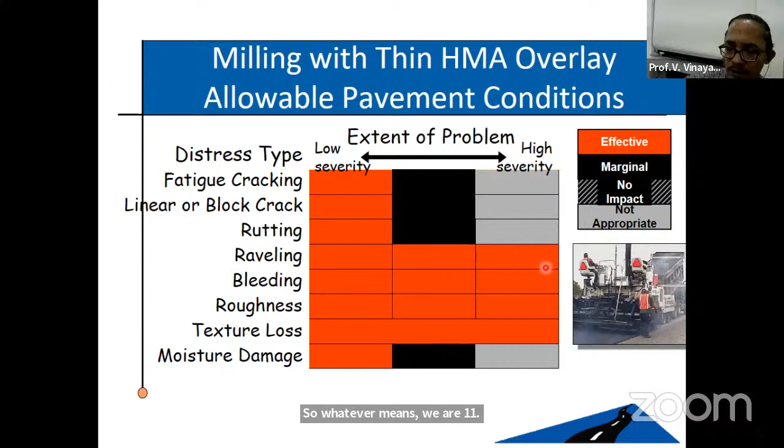You can see the beauty of this: raveling, bleeding, roughness, and texture loss - all these four failures can be completely taken care of if you go for recycling, that is milling with thin HMA overlay. Whatever milling we do, say 20 or 40 millimeters of layer, we completely mill it out and then recycle, relay, and provide the solution. Whatever may be the severity level, that solution is going to work for a very, very long time. Absolutely no problem at all for this.

So diamond grinding is another solution. This is basically for PCC pavements. Till now we have been discussing bituminous pavements, and this is for plain cement concrete pavement. Diamond grinding is required whenever the pavement loses its friction, because cement concrete pavement tends to lose its friction on a very fixed, frequent basis. Every 4 or 5 years, we have to do diamond grinding and grind the surface of the pavement.

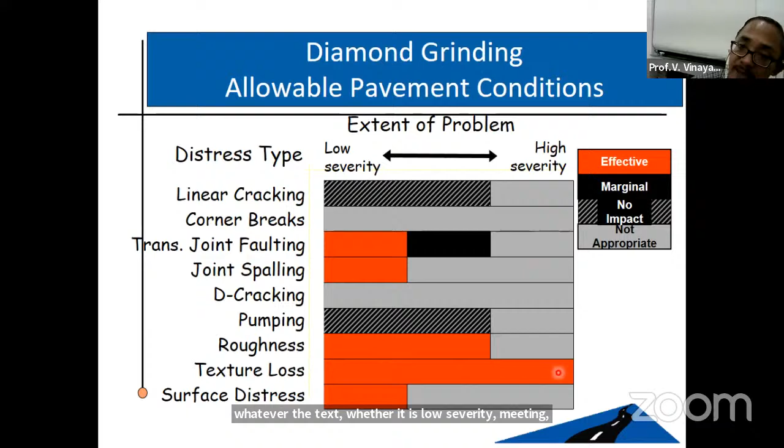Thereby you are restoring adequate friction on the surface of the pavement. This solution will help with roughness, texture loss, and surface distress. Texture loss especially - it is going to really help. Complete texture loss, whether low, medium, or high severity, is completely taken care of by this diamond grinding or resurfacing.

Then, load transfer restoration. When the cement concrete pavement is failing structurally, you can very clearly see cracks happening on the corners and edges, and the pavement will break into pieces. When such failures are happening, there could be a suspicion about the load transfer happening at the edges or corners. There you can remove the earlier non-functional tie bars and dowel bars, and then replace or retrofit new tie bars or dowel bars, thereby restoring the load transfer mechanism.

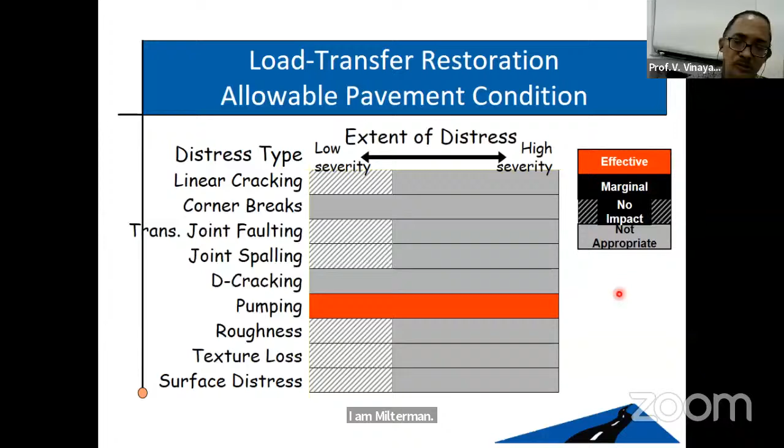So this is one thing, right time. Till now we have been discussing about various failures and various measures which are available, and at what level of failure condition we have to apply that measure. That also we have discussed. Now, what is the right time for this measure to take place?

For example, if you see, this particular sheet which is available with the FHWA, Federal Highway Administration. So again there is a crosstalk, so please help me in reducing this.

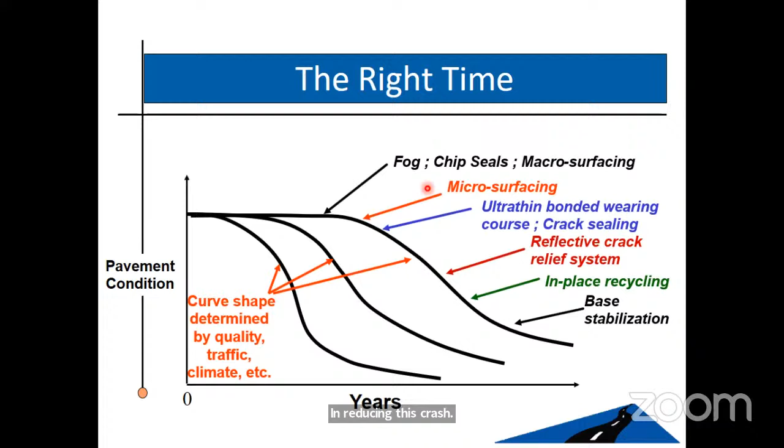So this is what is happening. You have multiple varieties and multiple stages at which these treatment options can be taken. Fog seal can be taken when the pavement condition is almost around 80, microsurfacing at around 70. I have not given the other details; more detailed graphs are available. So at what condition of the pavement, whether it is 60, 70, or 80, based upon the current pavement condition, these treatment options can be taken - that has been very clearly given.

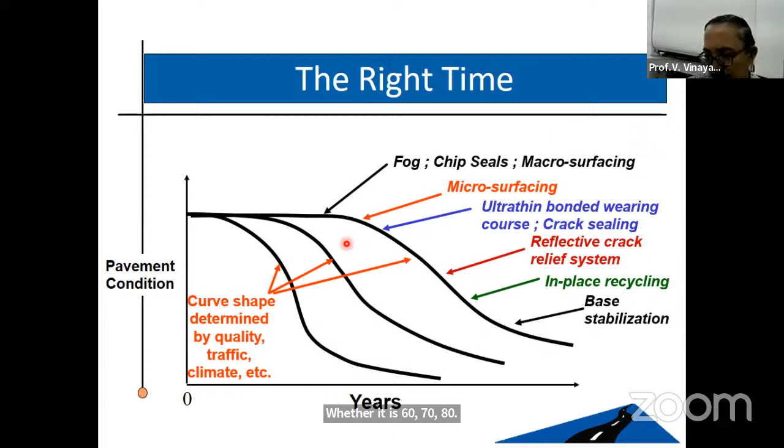Then what's the right project, which project has to be given the treatment option? That has to be decided by the engineer in charge based upon the network requirement. For example, if some road is prioritized, if it is an important road, naturally we have to prioritize that road and then give the option.

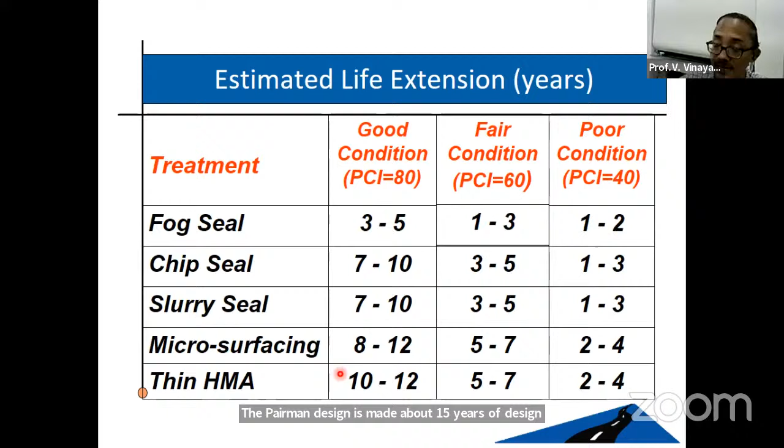Similarly, there's a beautiful table given by the Federal Highway Administration. When you are applying the fog seal coat, when the condition of the pavement is good, that is pavement condition is about 80, the extended service life is going to be 3 to 5 years. Similarly, for thin HMA or microsurfacing, if the condition is good, the extended service life is going to be 8 to 12 years. The pavement design is made for 15 years of design life, whereas your life extension is going to be 8 to 12 years again. So 15 plus another 10 years of extended life - the pavement is going to live for another 25 years instead of 15 years.

So likewise, these are not just numbers. These are numbers which have been established in the USA with a lot of studies, a lot of case studies, real life case studies they have done.

When you apply in fair condition, for example, when the PCI has reached 60 and you are applying microsurfacing, the extended life is 5 to 7 years. Whereas when the PCI is about 80 and you apply the HMA layer or microsurfacing, the extended life is about 10 years - so 10 years versus 6 years, 4 years of extended life is possible. When the condition has become poor, the extended life is about 3 years. So it is your choice as an engineer when to really provide this microsurfacing maintenance program so that you can extend the life like this.

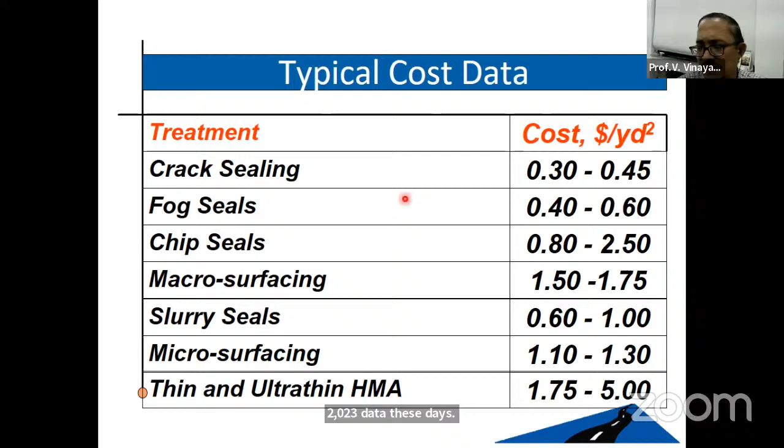Similarly, they have also given typical cost data, 2023 data - crack sealing, how much cost it's going to be, fog seals, this kind of data is available even for Indian conditions. So if you apply crack sealing, when to apply and at what frequency - crack sealing has to be applied every second, third, or fourth year. Similarly, fog seals are supposed to be applied between 2 to 4 years, every second, third, or fourth year. So the frequency of application is given.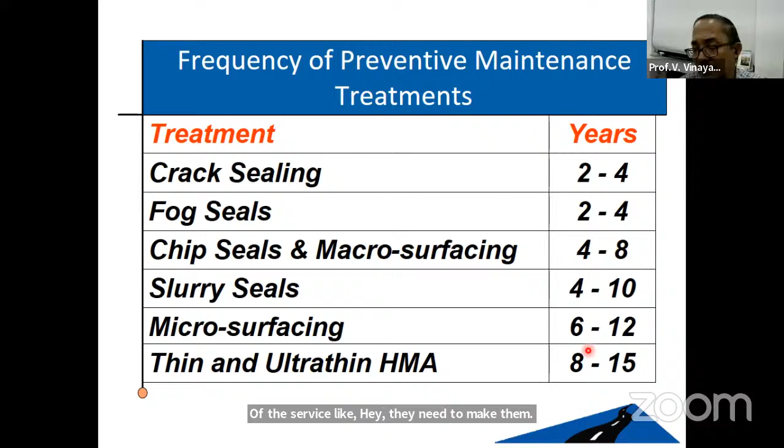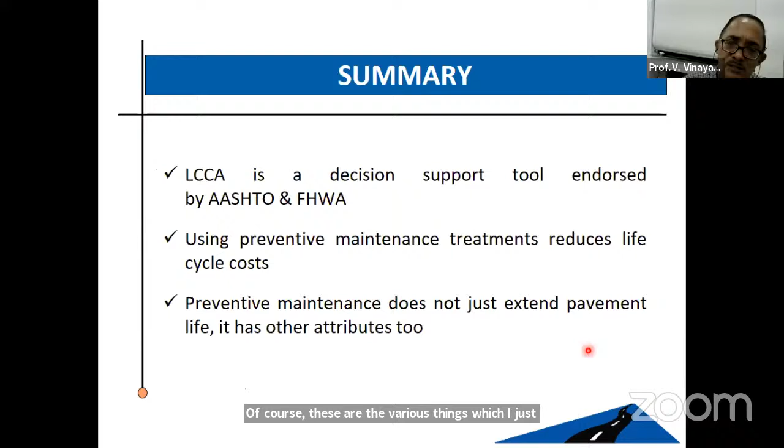Thin HMA, 8 to 15 years - so any time between 8 to 15 years of service life, thin HMA can be given. So when to apply the maintenance program has also been very clearly told in this manual. These are all the various things I wanted to highlight in this particular lecture. So in summary, we need to even do the life cycle cost analysis.

Whenever you are applying a preventive treatment program, people will have a kind of heartburn. When no failure is there, why should I even apply a maintenance program? Why should I go for micro surfacing or macro surfacing? What is the necessity when the road is looking nice, when it is still serving better?

These kind of questions will keep coming up unless you take a case study and implement this program very meticulously, and show to the entire country the various advantages. Indian agencies will not be able to appreciate this. America has already identified this, and American roads are good because they are actually conscious about preventive maintenance programs. This is one of the major deviations which American agencies follow.

They really maintain their vehicles within the load limits. Overloading mechanism is not pretty high in America, whereas in India overloading is also pretty high. We don't design the mixtures based upon the availability of our prevailing weather conditions. There is also inappropriate use of the type of bitumen or binder being used. These are all the various things which are really bothering our Indian context.

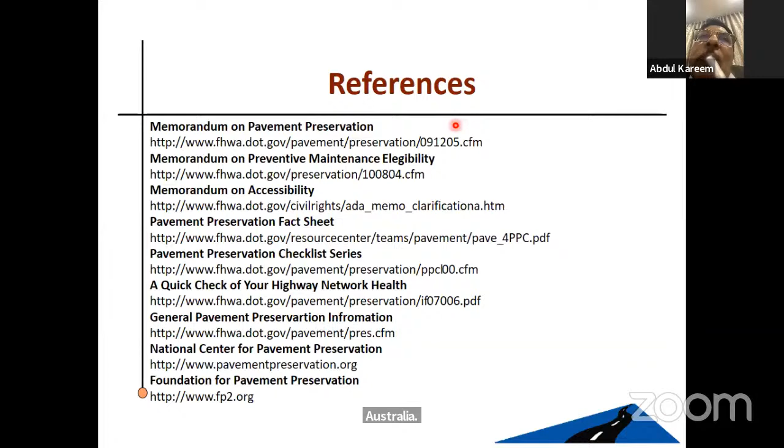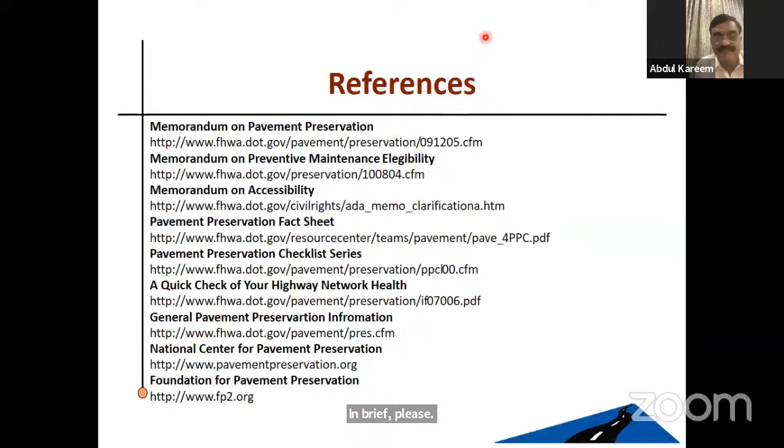Right sir, anybody else sir? In brief, sir, I'll take one second, sir, Chairman sir, with your permission. Okay sir, in brief, sir. Sir, when I appeared - good evening, sir. Professor Dr. Vinayaka Ram sir, highly appreciable talk, sir. Yes sir, yes sir, good evening sir, our national highway number 9, presently national highway number 65, I think, Hyderabad to Vijayawada.

One bridge was collapsed, sir, near the previous road. Kisara Steel Bridge was there. Our National Highway Authority constructed the same road by four-lane. With a small rain, sir, that was collapsed after a couple of years. I think it was in 2007 or 2008.

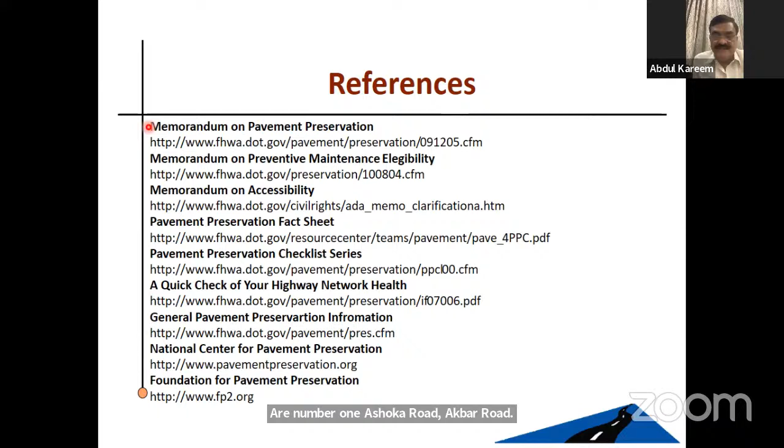Then what I mean to say is, in British government times, sir, you take in Delhi, the roads are number one - Ashoka Road, Akbar Road, Rashtrapati Bhavan. The camber is in such a way that a single drop of water does not stay, sir.

It's a very sad thing. Nowadays, due to cloudbursts or environmental imbalance, heavy rain takes place. Three months of rain falls in three hours, sir. So automatically the rain water goes against the BT surface.

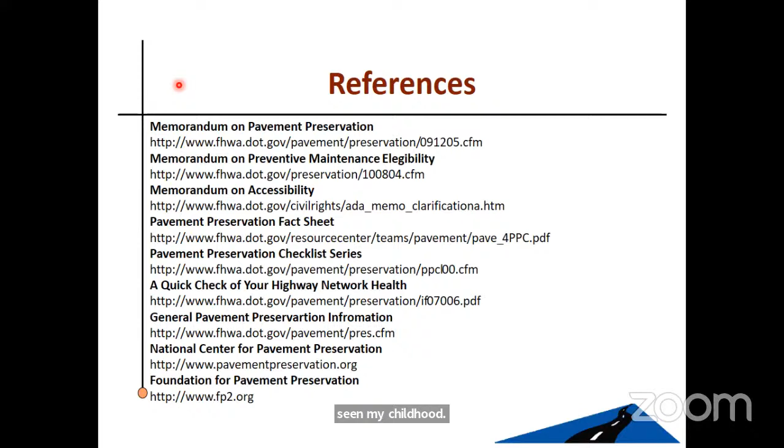Sir, Seshamananda Garu, can you say a few words about your father, S. Raghavachari Garu? Sir, namaskar. On behalf of our family, we would like to thank all for remembering our father and sincerely arranging these wonderful lectures. I still remember Vinayakaram Garu visiting our house. He is a family member for us, like my brother. Those were great days where students gave great respect to teachers. We have seen literally the Guru-Shishya relationship. I have seen in my childhood hundreds of people having great relation with my father, and great motivation for teachers.

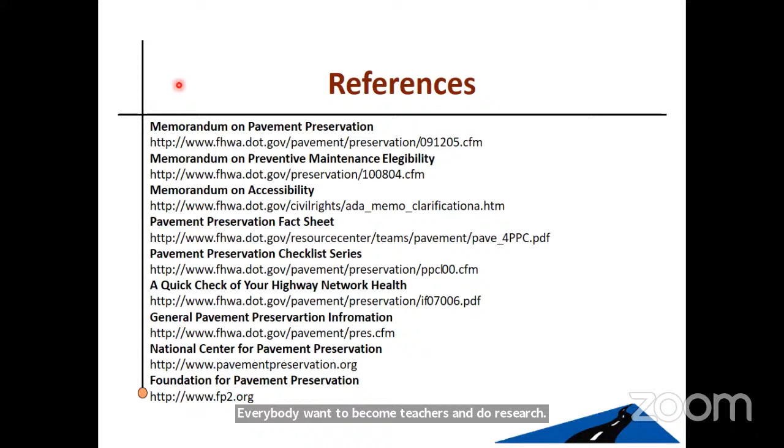For everybody who wants to become teachers and do research, it's a mixed feeling for the family. Thank you all for arranging this. We are so happy. Thank you very much, sir, Professor Seshamananda Garu.